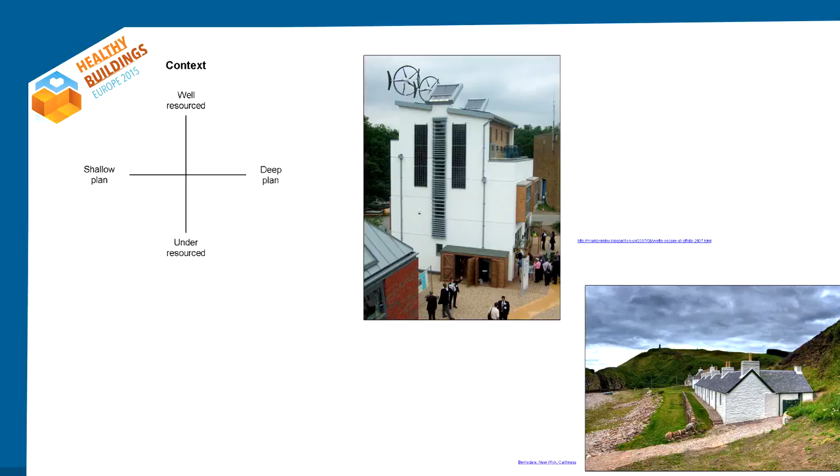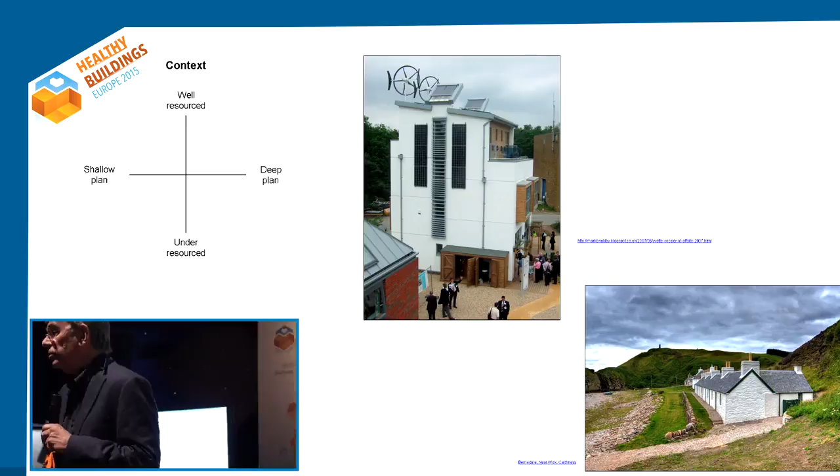And this is the kind of thing I'm talking about. There are thousands of examples, but this is a kind of cartoon example for a quick presentation. A fisherman's cottage in the north of Scotland, been around for 300 years. Lovely, simple building, will probably be around for another 300, but miles from anywhere. Works well, very simple. There's nobody in that part of the world who knows about mechanical ventilation and all the gizmos and kit that goes into this building, which is a demonstration house at the Building Research Establishment in Watford, which has got every bit of bling and technology hanging off it.

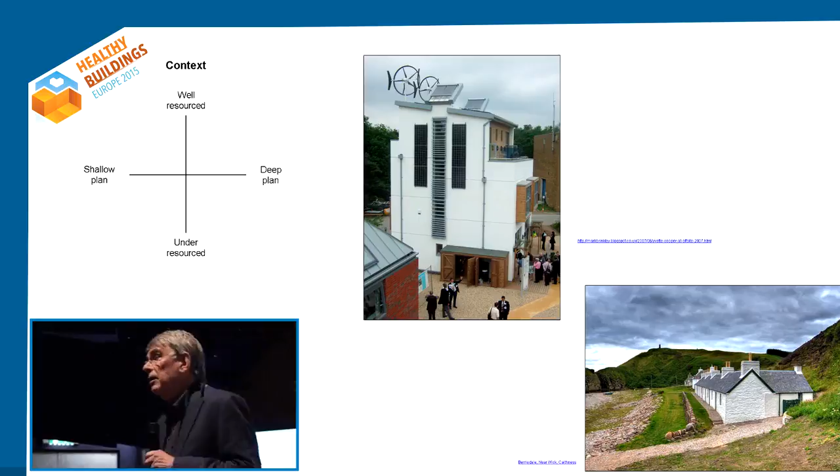Now, the thing about technology, it's like Dutch bikes. Dutch bikes are completely wonderful in Eindhoven, and I can't take my eyes off them. I love them. The thing is, why aren't they everywhere in the world? They work brilliantly here, but they don't work so brilliantly in Yorkshire, where you've got 1 in 3 hills to get up. It's like the London bus. It's great in London, but why not elsewhere?

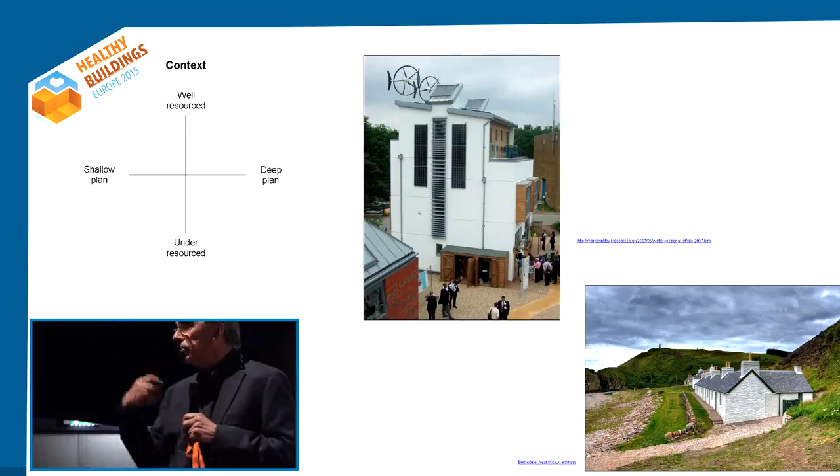This building is probably fantastic as a demonstration building in the BRE, but as a lesson for the future, no way. There's 10 PhDs and money and sponsors and so on behind that building. This one is more like a kind of Dutch bike of a building. Robust, slightly boring, but brilliant. Now, these are the dimensions that you need to worry about. And I'm going to build a diagram, and I'm doing it quickly because Marcel will hassle me to finish.

Now, this building is well-resourced, and it's a shallow plan building. And it was one that we studied about 10 years ago. The trouble was it didn't win Green Building of the Year because it didn't fit any of the received wisdom about wonderful design. It was just a boring building in Norwich.

Then we studied it, and suddenly it was on the front page of a journal that nobody reads, which is the Building Services Journal, which is great because we could be honest, and the gutter press don't get hold of it and splash it all over the newspapers, making your life difficult. But look at the headline: the best building ever. Don't be ridiculous. There's no such thing.

Now, this one, all the references, by the way, are on a separate page on the PDF. They're all clickable through. You can get them all. This one is a building where a lesson has been learnt, where there's been systematic feedback, where the National Trust headquarters at Swindon was studied, and the next generation of buildings worked on the results. And I've got a little bit of information here, which is about the user surveys on the building.

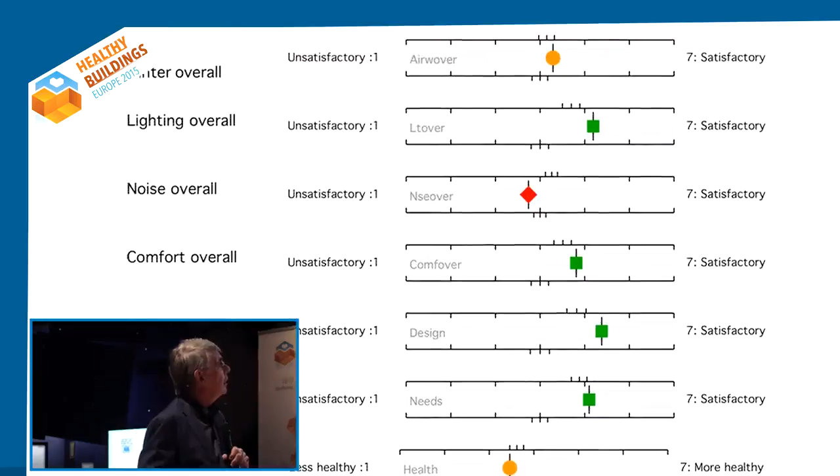Noise in that building, let me just, again, try and get my laser pointer. Noise is a red, which means it's significantly below the benchmark. And the rest are reasonably good. Summer temperature, they've all got greens. That is the profile of a really good building. Let's look at one which is a deep plan office building, under-resourced. This is the profile that you get.

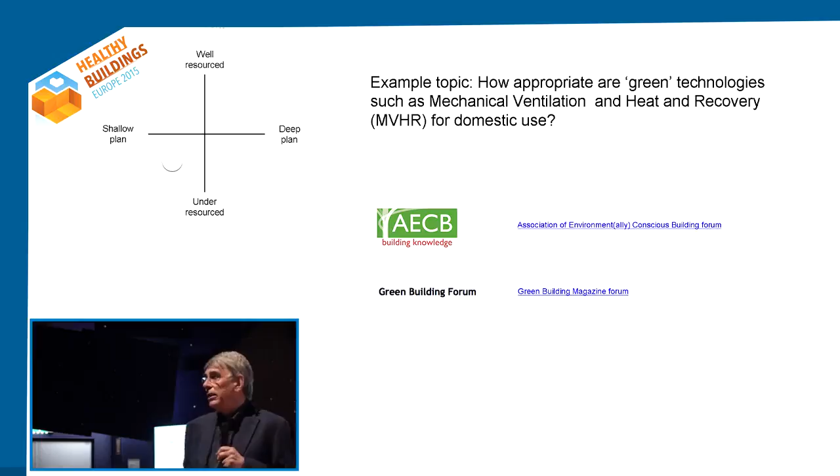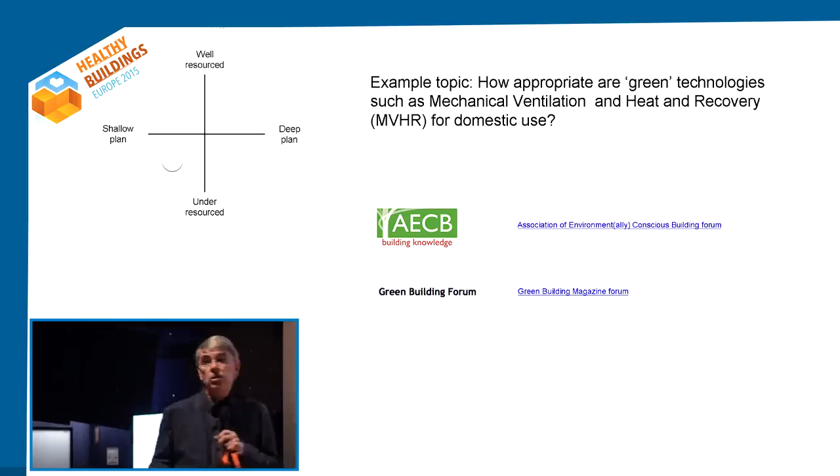Exam question. How appropriate are green technologies such as MVHR for domestic use? Answer, go to the forum for the green buildings and AECB, and they'll tell you. Now, again, it's a question of money, it's a question of brains, and it's a question of resources. And quite often, especially in the UK, sophisticated green technologies are failing in areas that are usually about summertime overheating. And one of the reasons is because they're barking up the wrong tree. They're trying to make sure that the building doesn't fail, it is not too cold in winter, forgetting about the summer. I mean, that's a really crude interpretation, by the way, but it's only got one line for one topic.

Don't worry about spring and autumn. It makes it too difficult. Just the summer-winter differences. Then, these are all time-related. And time-related stuff tends to get ignored. They tend to concentrate on the space and the building, not on things going on over time.

Time: is it the normal part of the week, or is it the vacation? In Britain, again in schools, all the robberies take place at the end of term, when there's a changeover; that's the risk period. When the holidays come.

The time of the week, weekday or weekend. You'll have all known about Monday morning cold buildings. It's a completely different profile. There's nobody there. The energy profile's different.

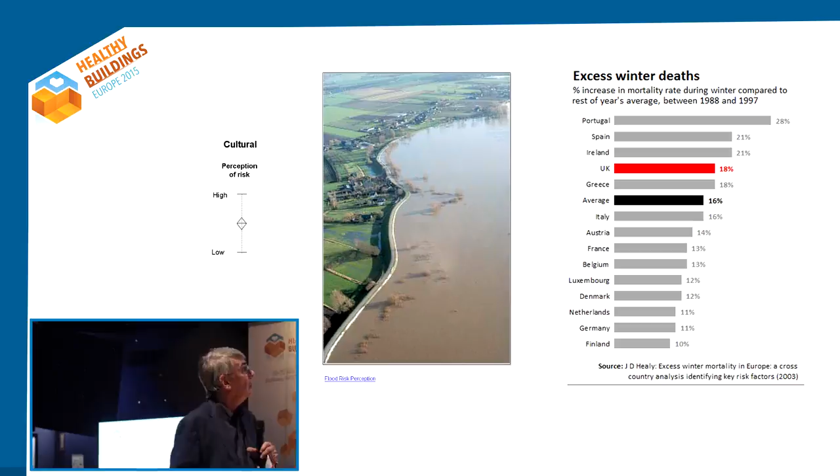Here's another example. Excess winter mortality in Europe. People dying as a result of it going cold. Where does that happen? It happens in Portugal, Spain, Ireland, UK, Greece, all the warm countries. All the cold countries, Finland, Germany, and all the rational countries, I'm told health and safety obsessed countries, although that's Crit telling me that, I don't actually know, the Netherlands, all those countries don't lose so many people in winter.

The mild countries, whose perception of risk is much lower, lose more people. It's an important variable. And the cultural geography, the perception of risk, needs to be in there. So we'll put it in the top right of the diagram.

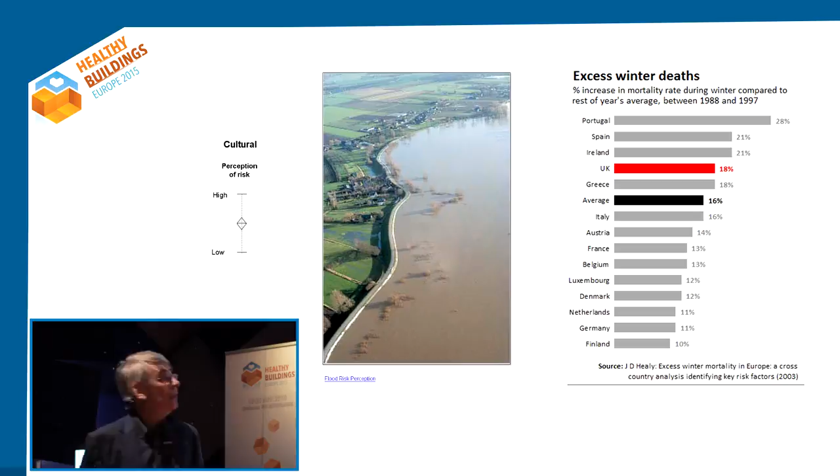Now I'm going to put another group of variables, again related to time. And this is where it gets more abstract and a little bit more peculiar. Management response time. In non-domestic buildings, in fact any buildings, the faster managers respond to the need, the better.

But when you start digging around in this kind of data, what you find is that everything's correlated to everything else. And there's lots of significant correlations in buildings, and that's because everything is correlated to everything else, because it's all connected. So you've got to be a wee bit careful with statistics in buildings. The management response time is definitely on the heuristic. It's definitely important. I'll come back to that in a moment.

Distraction. 20 years ago, when we were putting our questionnaires together, noise wasn't even on the questionnaire. Unwanted interruptions now are a complete plague in buildings, as you'll know from working in them.

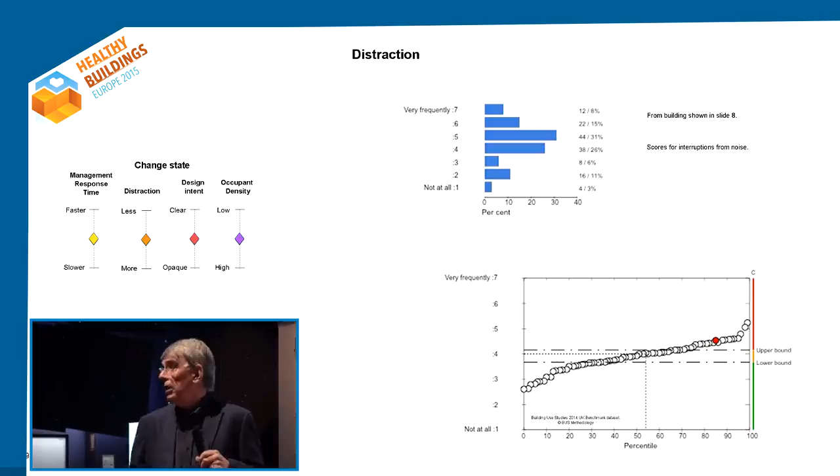And so that is going to go onto the map. And this is just a histogram from the building that you saw in slide 8, the earlier one, the Woodland Trust, which is a good building, but has got, I don't know, what, 60% of the staff frequently distracted. Not good, that. And a lot of the distractions never get fixed, like slamming doors.

If you sit next to a door that slams and doesn't have a door closer that's quiet, that drives you crazy. And it's the sort of thing that never gets fixed. That's the kind of low-level, chronic nastiness that's in many, many buildings.

The next one, this is important. And it's something that we didn't really understand until you get a eureka moment when you're doing a case study. It is, yes, personal control is important, but you mustn't have too much of it. Too much personal control is not a good thing. What you find is that if users in buildings understand design intent, in other words, if they understand what is supposed to happen, they will be more tolerant of things that go wrong.

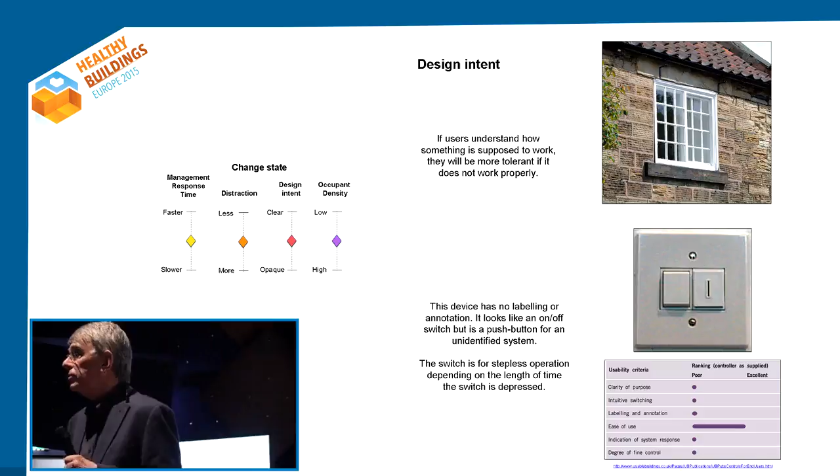Now, this is an example. This is a horizontal sliding sash, which is a vernacular window. It slides horizontally. It doesn't slide vertically. And it's a kind of cheap Yorkshire version of the vertical sash. Now, users understand how it works. It's obvious how sash windows work. It doesn't work very well, though. As a result, they're dying out, and probably quite rightly.

But users like that sort of thing. They like sash windows because they can immediately see what to do, they immediately get a response, and they can immediately know whether the environment is being improved. And we've already seen, the first laugh we got in this conference was for somebody showing a ludicrous control. A kind of radio volume control, which is the wrong way of doing the thermostat, as somebody pointed out on the panel, because people tend to either turn the volume up to full or down to low.

Now, this is the sort of thing. No labelling, haven't got a clue what it's for. And if you look at this little assessment here: clarity of purpose, very poor; intuitive switching, very poor; labelling and annotation, very poor; ease of use, brilliant. It's dead easy to use, you press it, but you haven't a clue what it does. Indication of system response, none, there's no light or buzzing noise or anything.

Now, Apple had a guy called Donald Norman who wrote a great book called The Design of Everyday Things. It used to be called The Psychology of Everyday Things, but the word psychology is a big turn-off to many human beings, so they called it The Design of Everyday Things instead. And they were obsessed with usability, and quite right too. If design intent is communicated clearly, occupants will be more tolerant and happier as a result.

The next one is occupant density. And this is Yorkshire dialect. And I'm thinking, I've got no chance giving Yorkshire dialect to an international audience. "There's most fratchin where there's least room," which means where the density is high, there's a great deal of quarrelling. And that is exactly true in buildings. It's like a party: the more people come, you suddenly get a threshold when it's noisy, it's hot, and you want to escape.

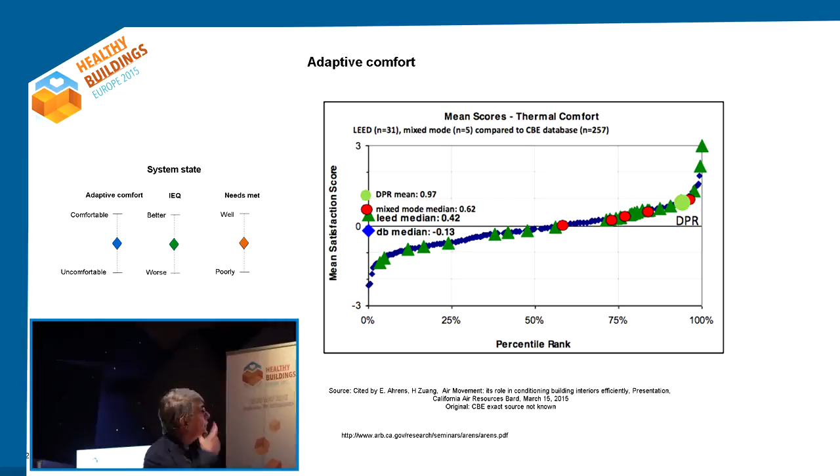The next one is the system state. And I've got three things here: adaptive comfort, indoor environmental quality, and needs. And let's just do one very rapidly. We're doing an entire subject in about a minute here. Whoops, I've gone one too far.

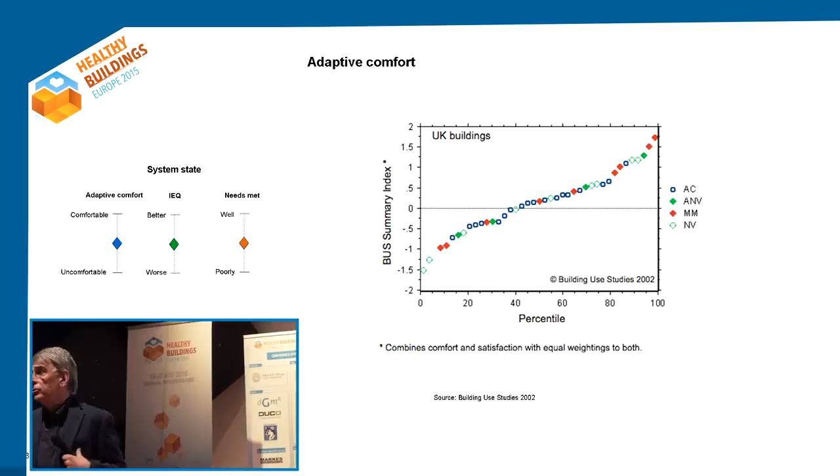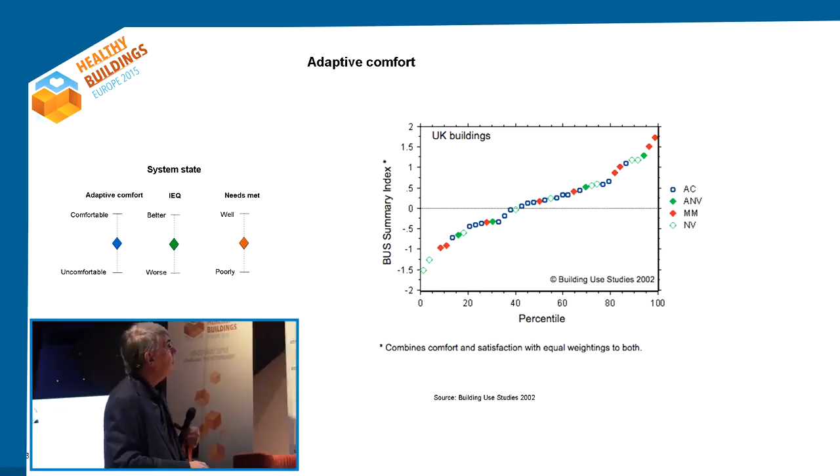This is a diagram from the USA showing mixed mode buildings tend to have higher mean satisfaction scores. Mixed mode means a mixture of air conditioning and natural ventilation. That was 10 years after we did one that showed mixed mode buildings, the one in red, were tending to be the best buildings in Britain, but also there were some bad ones as well. You always get that. It's always the context. If these buildings were under-resourced, they would immediately have poorer scores.

Now, indoor environmental quality. I looked that up on Google, and you're going to get that all week. There are only 626,000 results on Google Scholar on indoor environmental quality. And as you lot know much more about it than I do, I'm going to leave that one to you and to the rest of the conference. And especially the seminar, there's a seminar on workplace productivity and indoor environmental quality. That's the sort of thing that we're talking about here.